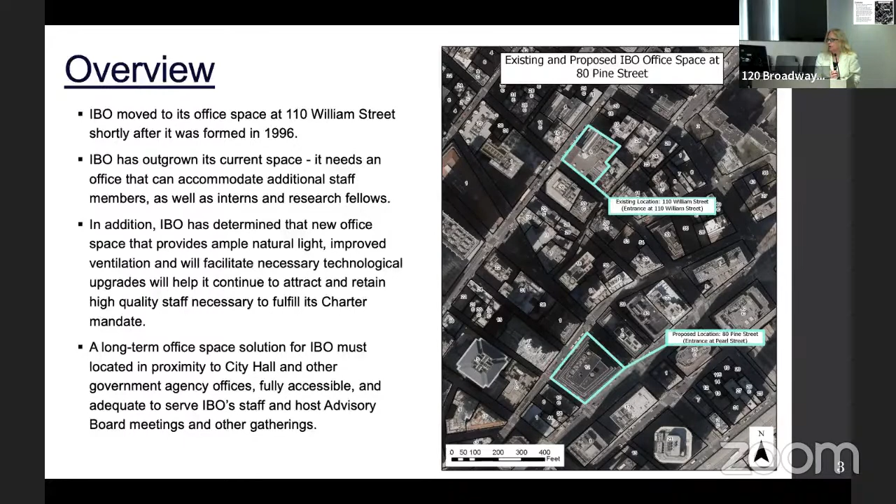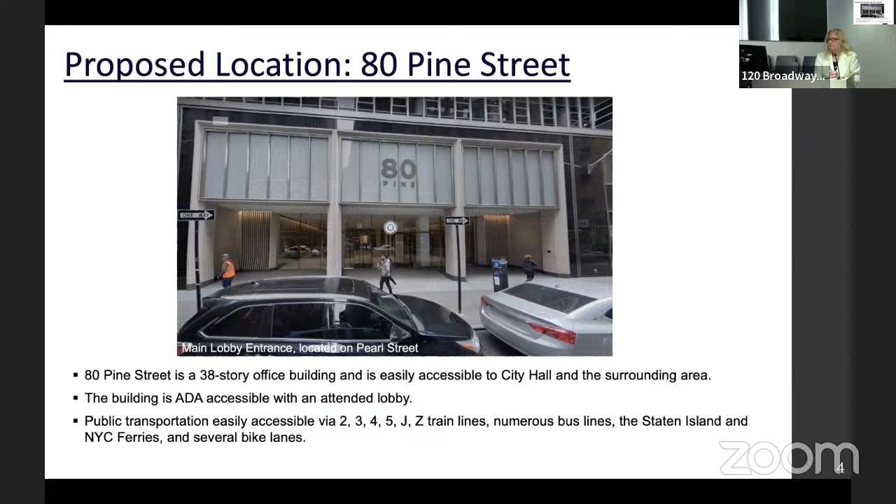Next slide. 80 Pine is, as you can see, well located for what we need for proximity to the key city stakeholders that we deal with, principally the council. And that's it.

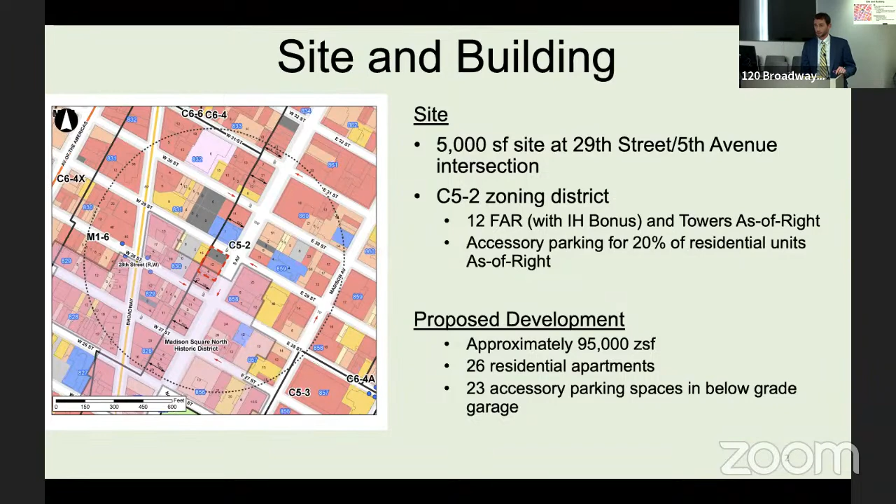Just a little background: 23 spaces, but the driveway, curb cut, and garage itself are all permitted as of right. We're only here seeking an increment of about 18 spaces. It'll be an automated parking system. These are pretty prevalent around the city in these types of buildings for the last decade or so. Completely self-controlled, so really no kind of human error entering and exiting the garage.

Overall, the garage is very small, only 23 spaces, so we really don't anticipate it causing a lot of traffic congestion. But to avoid any sort of conflicts there, and we'll show on the plans momentarily, there are some additional provisions in terms of loading and unloading in the subcellar to prevent conflicts with cars coming in and out that we really don't think will be an issue.

But what we're really proud of is that it's going to be a fully electric parking garage. What that means is that all spaces will be EV ready, so the infrastructure to charge your car will be in the garage. When a driver pulls in and parks their car, the pallet will have a plug you can plug your car into, and then the elevator will take it down to one of the lower levels. Within the lower levels, there'll be 11 spaces equipped with an EV level 2 charger, which can charge a car in up to 8 to 10 hours for a full charge.

And while that's only half of the spaces, the system we programmed will automatically rotate cars in and out if all 23 cars want to be charged. We think there's no other garage in the city that has that capability, so it's a great amenity for residents, and we think it's going to promote the ownership of electric vehicles.

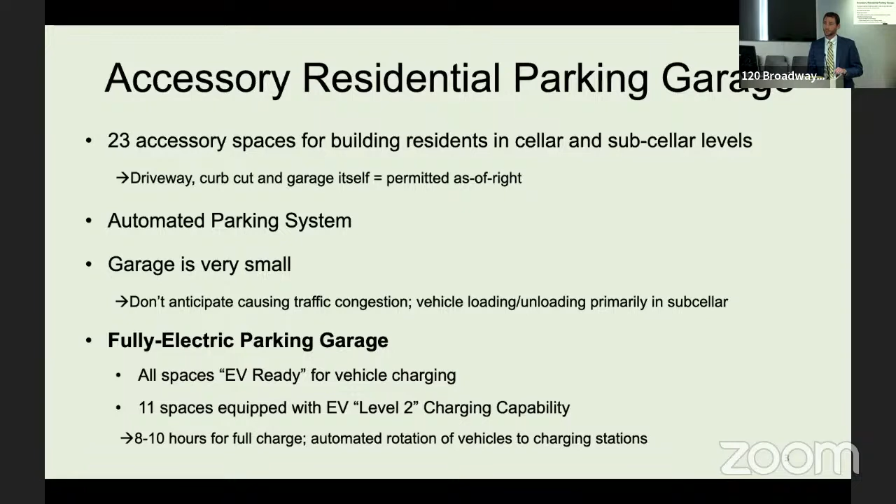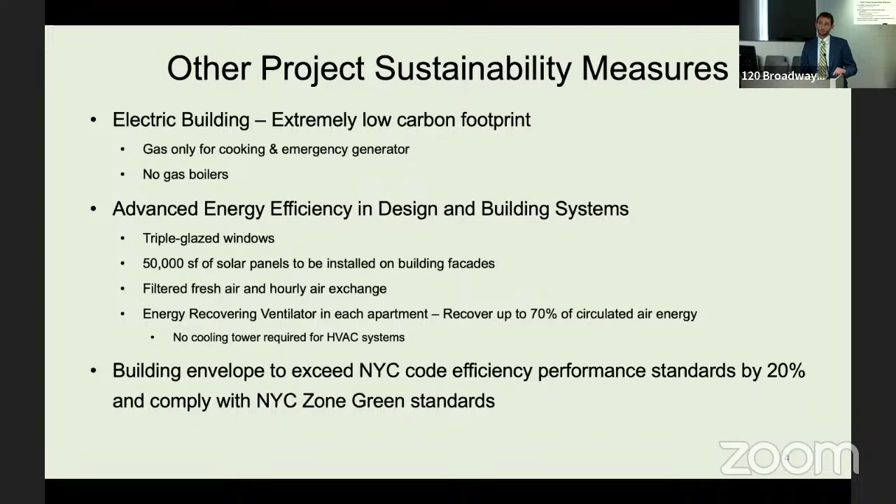Just some other sustainability measures the developer has taken great lengths to pursue for the project overall. It'll be an electric building, except for gas for cooking and the generator. It'll have triple glazed windows, 50,000 square feet of solar panels, filtered fresh air hourly, and energy recovering ventilators in each apartment. Overall, the envelope will exceed code efficiency performance standards by 20% and comply with Zone Green. So along with the garage and EV charging stations, there are a lot of efforts to go above and beyond what's required by code in terms of sustainability and addressing climate change and global warming.

As you can see, here are the 3 subcellar and cellar levels, with the elevator in your upper left. When it gets to the desired level, the robot will pick up the pallet and move it to one of the various available spaces.

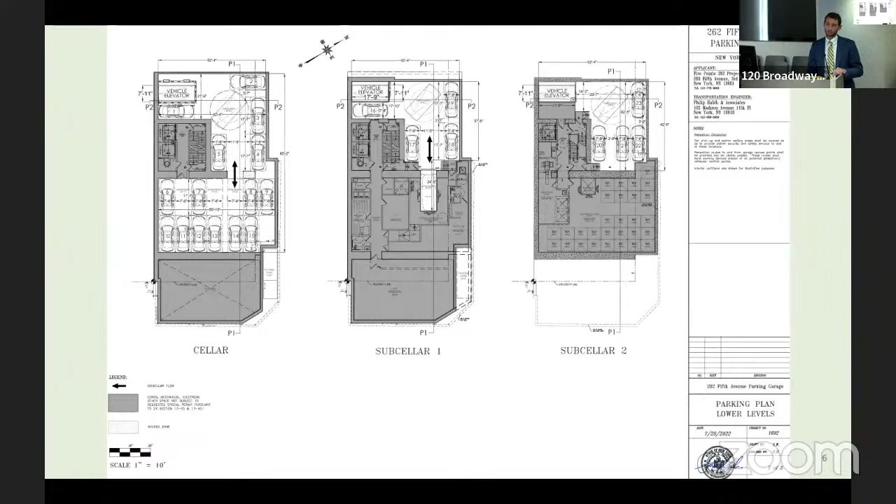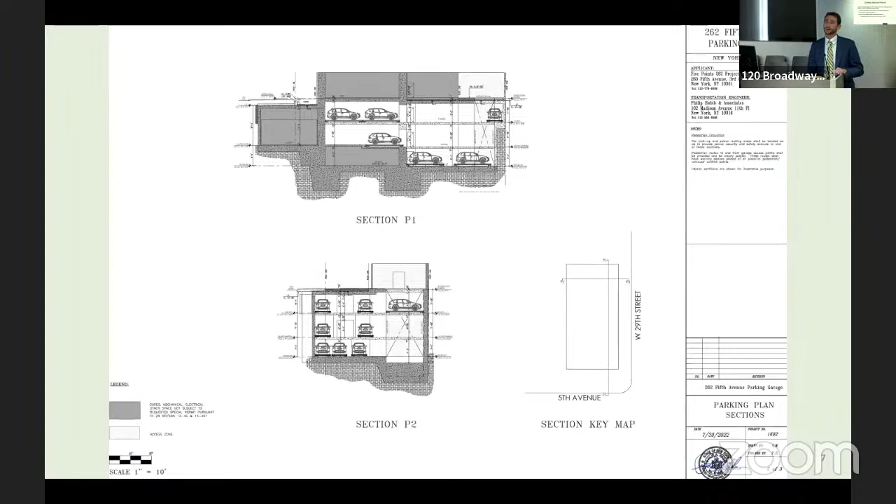And here is a section. Again, all cars will be below grade on the 3 levels. And again, while we're here, the special permit allows 5 spaces as of right based on the 26 units in the apartment. We're seeking an increase of 18, but otherwise the driveway, the garage, and the curb cut will be built because they're permitted as of right.

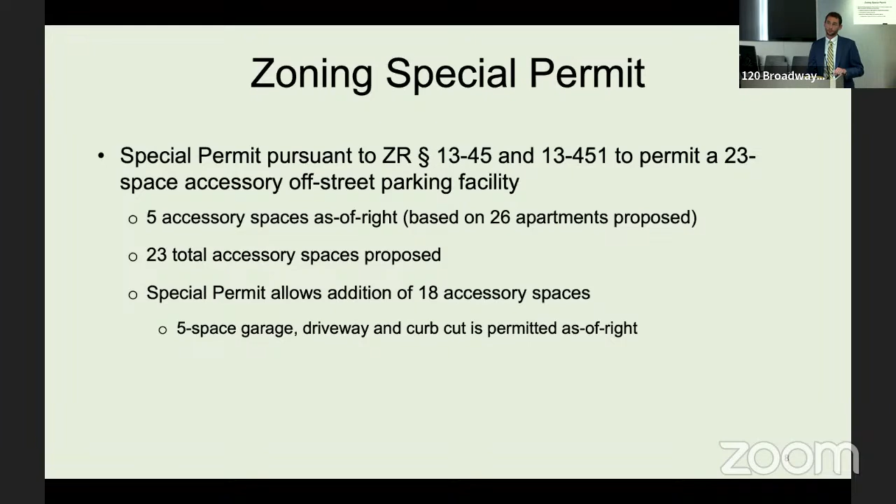And in terms of the findings, I'll turn it over to Jeff. Good morning, Chair Garodnick and Commissioners. My name is Jeff Rubin, I'm a planner with Philip Habib and Associates.

As indicated on this slide, the application easily meets the finding that the number of spaces requested is not excessive in relation to new residential development and changes in parking supply, according to the methodology prescribed by the Department of City Planning.

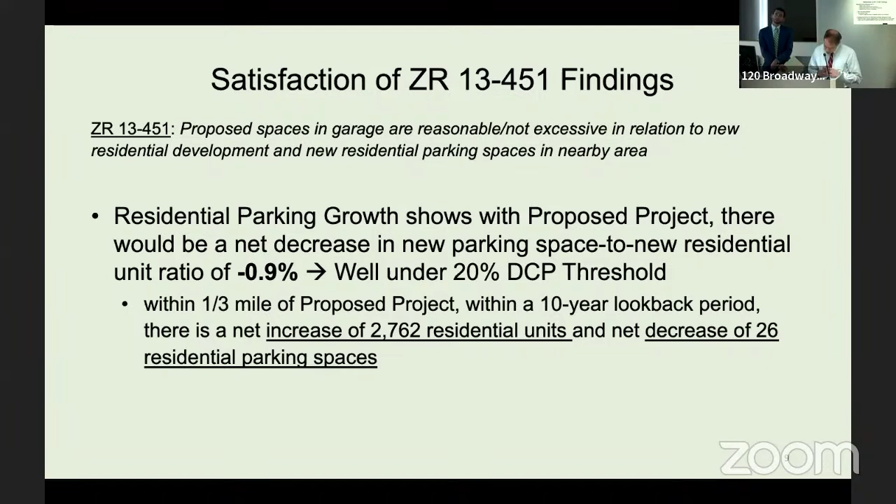Regarding other findings, in terms of traffic, although a project of this small size does not require an EAS, we prepared a travel demand forecast following standard CEQR methodologies. The forecast shows that the proposed 23-space residential accessory parking garage will generate only 8 daily vehicle trips on a weekday and 9 daily vehicle trips on a weekend day, with no more than 1 vehicle trip in any given hour. As such, it would not unduly increase traffic congestion.

As for parking demand, census data suggest that vehicle ownership across Manhattan is positively correlated with high-income households. Given that this will be a building with large family units, each over 3,000 square feet, the data suggests the building will have a much higher vehicle ownership rate than the surrounding area. While the area's census tracts have a 31.5% vehicle ownership rate for owner-occupied units, the building's families will be comparable to those in neighborhoods with a concentration of high-income homeowners. Census data from comparable areas show vehicle ownership rates for owner-occupied households of 75% in West Tribeca, 68% in the area just below Central Park, and 86% in Carnegie Hill on the Upper East Side.

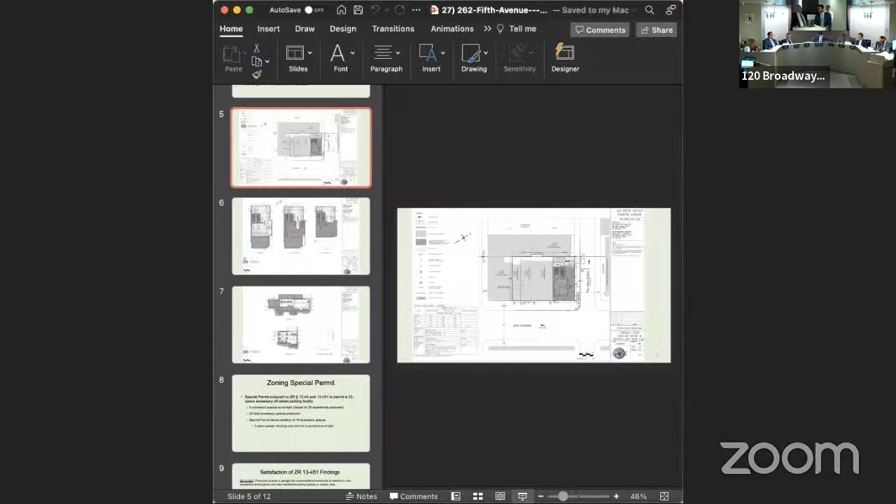The low grade or at grade? At grade. Just walk me through the mechanics. A car comes in and it enters into the elevator, right? Correct. And so the vestibule is just ahead of that space? Yeah, this is looking west, so just below is the vestibule. So it'll pull into the driveway, go through, a gate will come up when they access it through a code or an app. Gate pulls up, they pull into the elevator, they park the car on top of a pallet, which is sitting on the elevator. Everything comes out, and then just to the east, below is where that vestibule is, where the keypad is, they'll put in their code and send it down to the lower levels. If you see the vehicle elevator, there's that white space just below, that's the vestibule.

Here? Further north. Up. Yeah, just the white area. Right there. No, to your left. Yep, right there. Yeah, we need a pointer. The light pointer. Okay. Laser pointers, that's confusing. All right, because it's turned. Thank you, Mr. Vice Chairman.

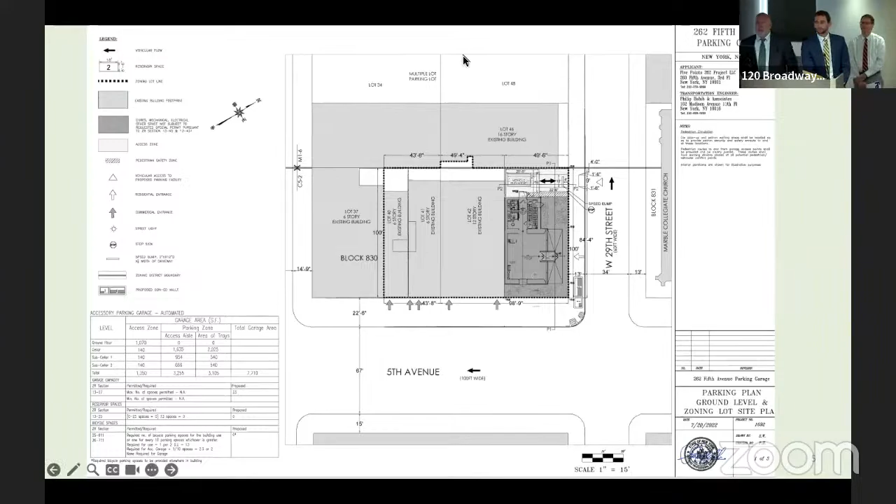No, I'm good. Commissioner Rampersad on Zoom. Yes, thank you, and thank you for the presentation.

A lot of the questions I had were already answered. I just have two quick questions. With regards to each space having an electric vehicle charging station, if the car comes in, does someone plug it in, or how does that work? The owner would be the one plugging it in. It's similar to plugging into a charging station if you were driving around or in a parking lot somewhere. They'll take out their own cord, plug their car into the socket in the pallet, and then the robot and the elevator take it from there to one of the stations below grade. When the robot pulls it into one of the lower levels, it moves it to one of the level 2 charging stations, which has a port in the floor. The pallet is lifted up, the port pops up, connects into the pallet, and it's a pass-through to the car, giving it the electric charge. Thank you for that clarification.

The other question I had was, God forbid there are actually two cars that come in within the hour, what mechanisms are in place so that the car out in the street that wants to turn in knows that maybe there's somebody waiting for a car? Is there some kind of system in place, or proposed to be in place, so people know? Well, again, as you mentioned, it's going to be incredibly low because of the 9 car, at the most, 9 cars in and out of that garage in a day.

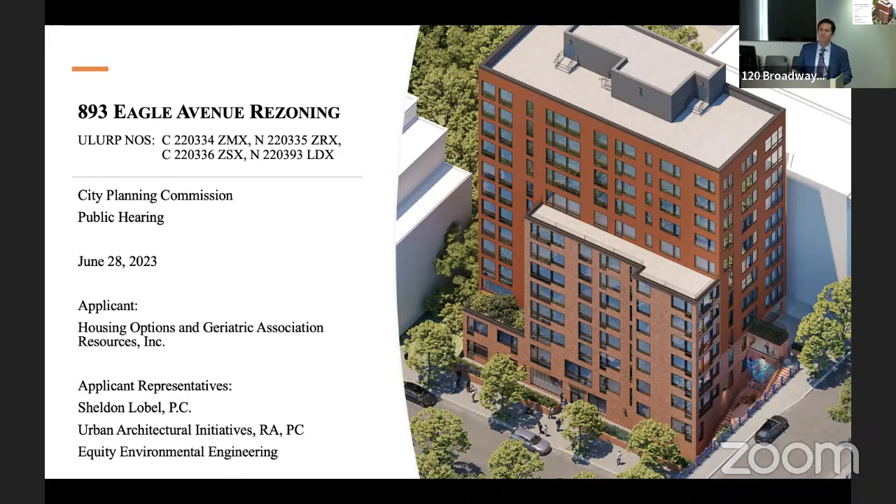Good morning to all of the commission. I'm Ed Papetti, CEO of HOGAR Inc., and thank you for the opportunity to present our project this morning. For the past 27 years, HOGAR has provided housing and supportive services to our community's most vulnerable individuals and families. This proposed project at Eagle Avenue and 161st Street seeks to transform a property that has been vacant in excess of 50 years into one that provides affordable housing for those in need, services for those in need, and employment opportunities to those seeking to join HOGAR in helping those who require our helping hands. As you can see from these slides, the present condition of the lot for 50 years is an eyesore, and we hope to transform that. With that, I'd like to turn the presentation to our development team, and thank you again.

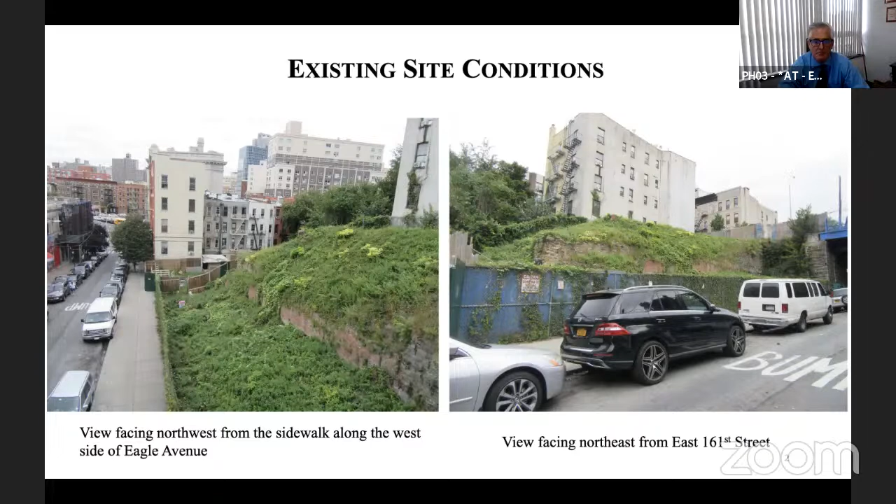Next slide, please. Actually, if you can forward 3 slides to the proposed development. So we're hopeful today that the Commission will join Community Board 3 and the Bronx Borough President in approving this application. Can we go back 2 slides to the project summary? There we go. So, the proposed development.

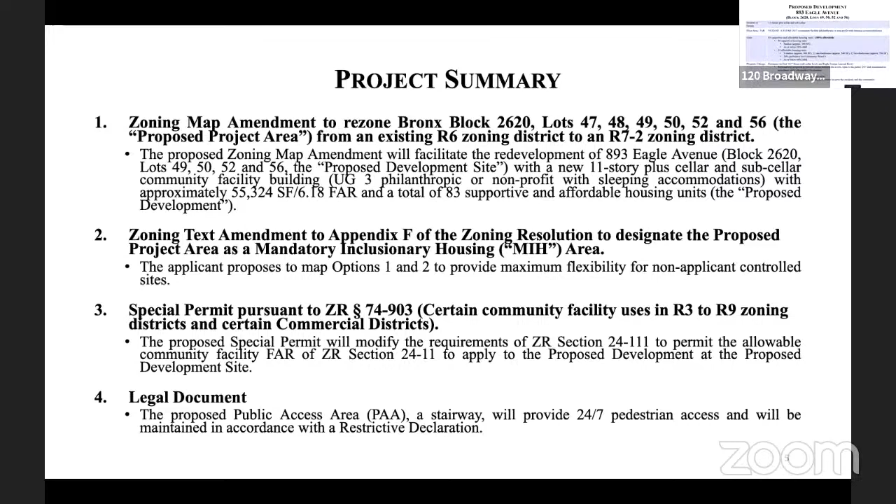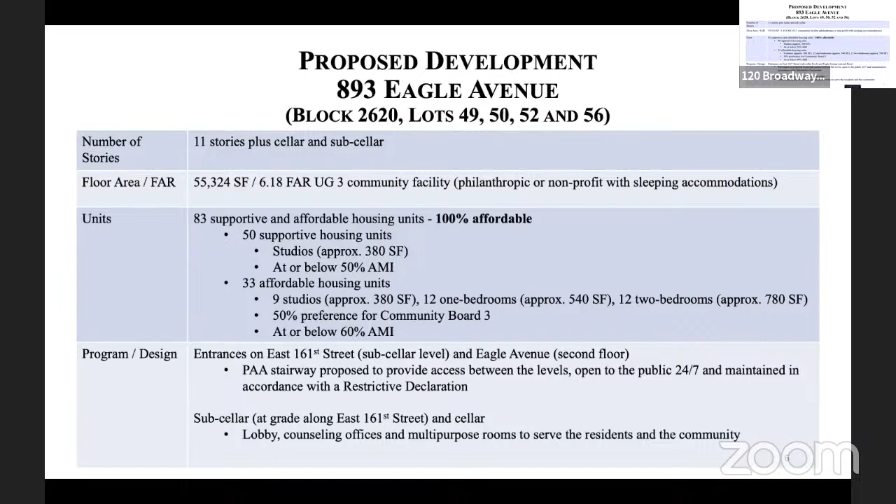So the proposed development contemplates 4 actions. One would be a zoning map amendment from an existing R6 to an R7-2 district, which would rezone 6 lots in order to allow for the development of the 4 lots of the site, roughly 8,900 square feet, with an 11-story building. The second action would be an amendment to mandatory inclusionary housing to allow for options 1 and 2. The third action would be to allow for a special permit pursuant to 74-903 to provide for community facility floor area to apply for the site. And the fourth would be a PAA, a public access area for stairs adjacent to the parcel, which will be included in the plans.

The statistics with regards to the development are before you. This is an 11-story plus cellar and subcellar building. This is a particularly challenging site because given the elevations of East 161st and Eagle Avenue, there's a separation of greater than 30 feet, which Tony will discuss. At the end of the development, we would intend to have a 55,000 square foot, 6.18 FAR, Use Group 3 community facility building. The units would be 83 units: 50 supportive housing units in the form of studios at or below 50% of area median income, and 33 affordable housing units, a mix of 9 studios, 12 one-bedrooms, and 12 two-bedrooms.

Those would be at or below 60% AMI. The program design has entrances on East 161st and Eagle, as well as a subcellar with lobby and associated accessory space.

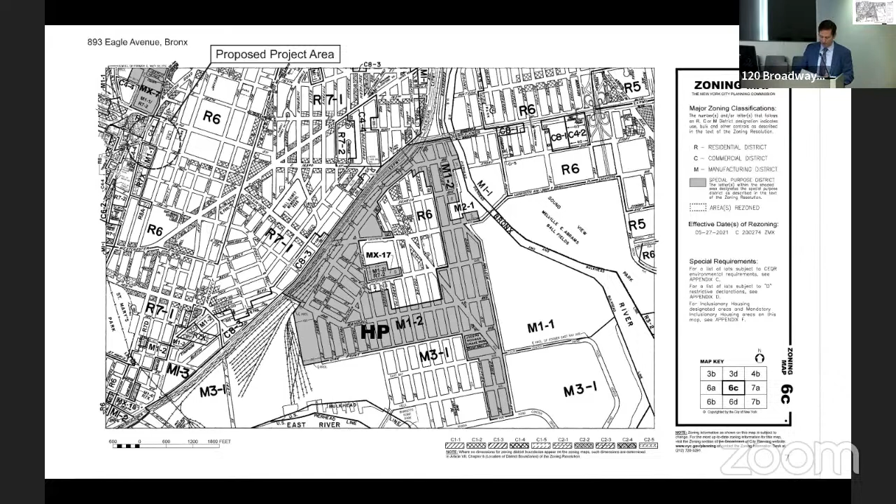The next slide is a tax map which shows the immediate development area. Again, this is a corner with excellent street access to both Eagle Avenue and East 161st Street, and the proposal is for the lots outlined in red to be part of the development site. They are all currently vacant.

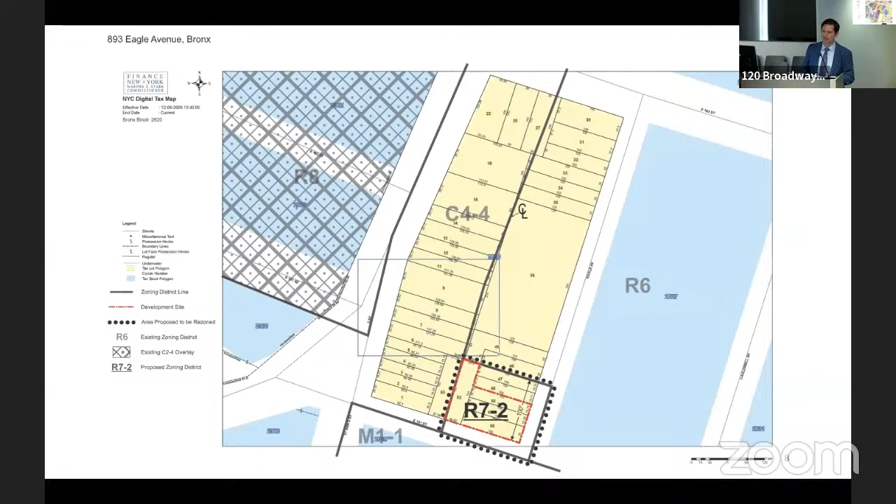The next slide is the land use map, which I think well demonstrates why this site is particularly well suited for an R7-2 rezoning. First, you note that the C4-4 zoning, which is adjacent to the site immediately to the west and on the entirety of the western portion of the block, already permits an R7-2 equivalent at floor area ratios of 3.44 or greater, depending on the nature of the development. In addition, you can see the R7X and R8 to the west of the site. As previously noted, this is an area where medium and medium-high density zoning districts abound.

The street system in the area is also well suited, with excellent street access for both the site as well as the entirety of the block. 3rd Avenue, adjacent to the block, is a wide street which allows for several bus lanes as well as benefiting from nearby subway systems. I believe the 2 and 5 lines lie within 6 blocks of the site. So it's really a site that is well suited for this type of development.

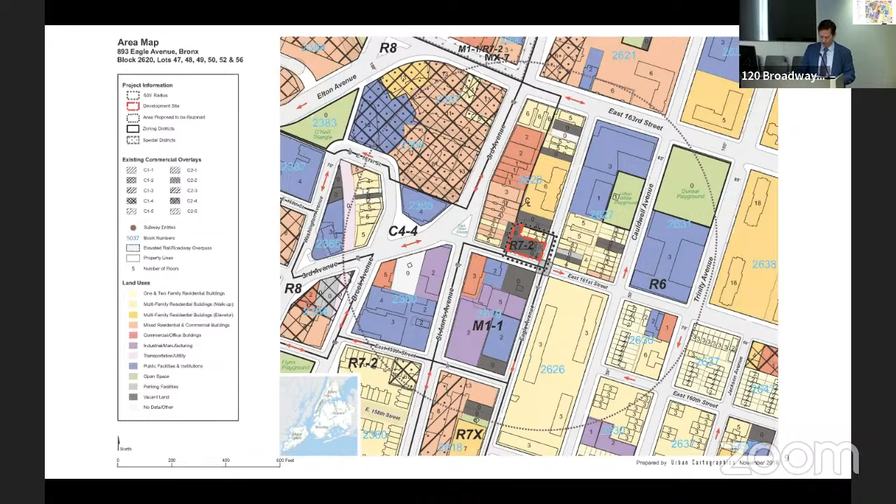With that, the next several slides are photographs, and I would introduce Tony Shitemi of UAI to discuss the project architecture.

Is Mr. Shitemi on Zoom? He is on Zoom. There we go, okay. Tony, we don't hear your audio. He's off mute, but the mic. While Tony fixes his audio, I'm just going to run through the contextual and architectural aspects of the presentation. Fortunately, I have a junior architecture degree from spending so much time with those guys. If we can go past the photographs to this first - is this any better? There we go, thank you, Tony. Okay, although Rich, I was sitting back to listen to you. Sorry about that technical glitch.

Good morning, members of the commission. I'm Tony, architect for Hogar, here to present the design description. Sorry about the snafu. I'll give you a few overall highlights and the essentials of the project.

As you can see, and as Richard demonstrated, the project is located at the intersection of 161st and Eagle Avenue, which rises 33 feet above 161st, presenting a very interesting site in terms of the slopes. With respect to building heights, the design aims to respect the existing heights of surrounding buildings. Although the new building will be 11 stories tall, it will be set back from the street. Along East 161st Street, the building will drop to 2 stories.

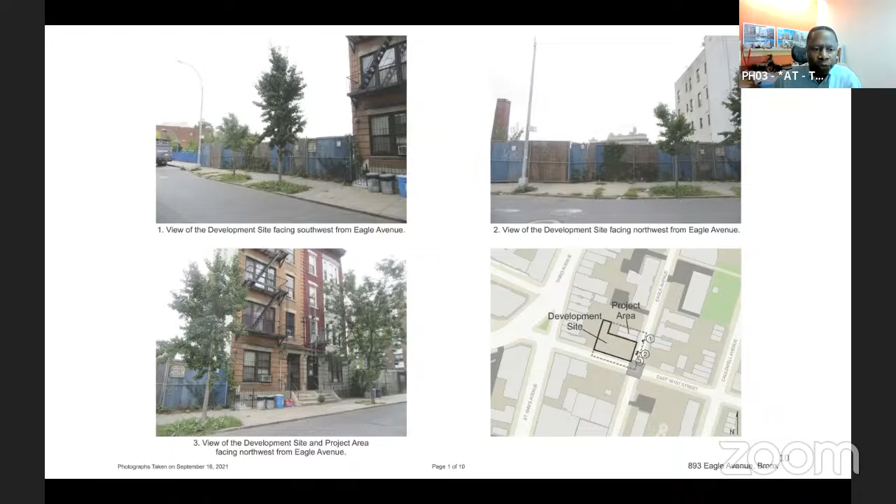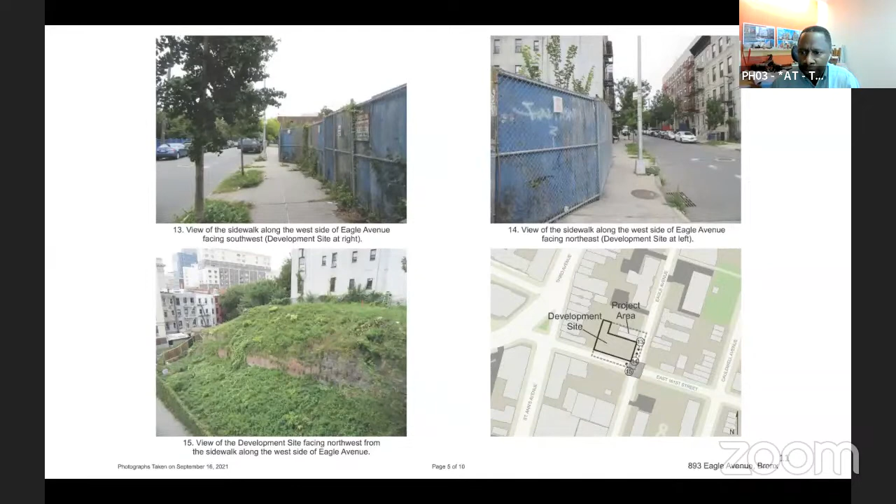Can we go to the next slide? The large perspective, if it's available. And that'll relate to the quick narrative. We have that overall perspective, Amanda? It's one more, or two more, one more from me. There you go, okay, the one of the building. I'm sorry, one more. Yeah, sorry folks. Okay, so here we go.

So the east is at the bottom right, and the west is to the left. North is facing up the page and south down. Again, the building aims to respect the heights of the surrounding buildings. There'll be 11 stories, set back from the street, as you can see. Along 161st Street, the building will drop 2 stories and then step up to 8 stories, acknowledging the existing 5- and 6-story residences.

And then we can go to the one before. The aerial maps indicate the presence of 200-foot tall residences just 2 blocks away, and others of similar height in the vicinity. Are we able to go to that diagram?

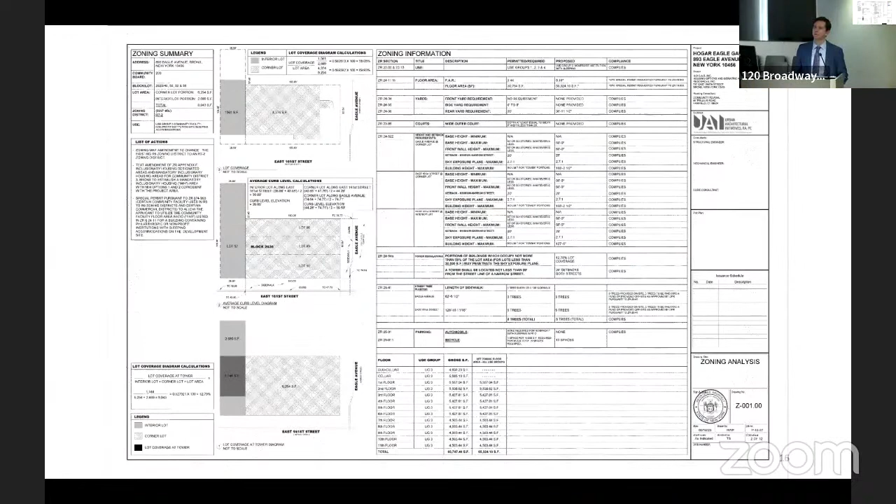I think it was before. I think it's back to. Yeah, sorry about the shuffling.

I'm going to go back two slides. Okay, I think it was right before this.

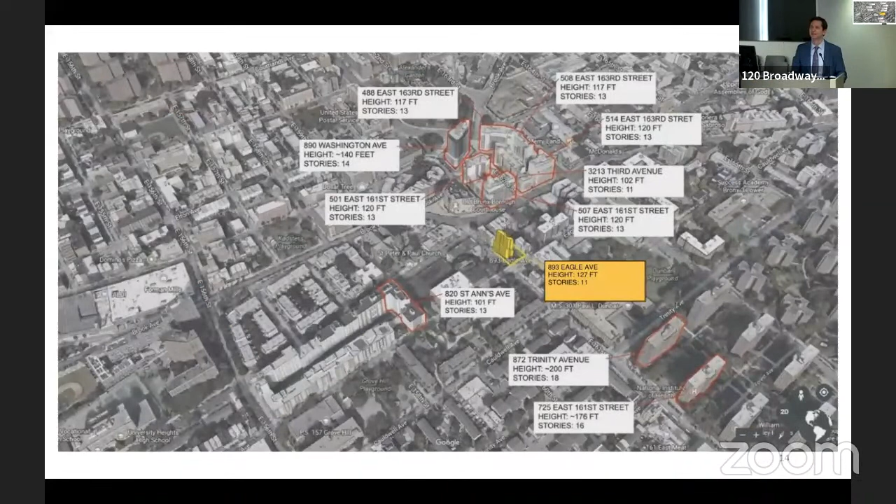Yeah, there we go. So again, you can see some 200-foot buildings around the vicinity. Our building's 127 feet, so within the vicinity we're complying with, or keeping respectful to, what's surrounding.

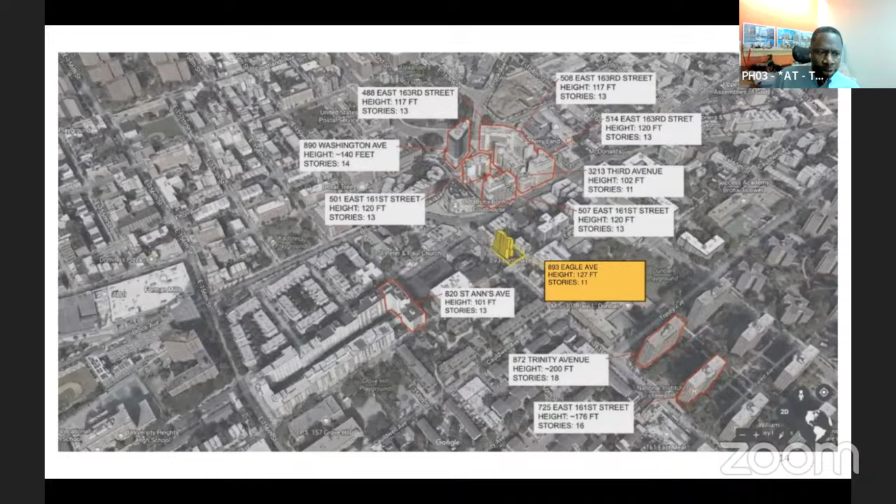The structure will be concrete block and plank, as the engineers proceed, that's our anticipation. So we're improving the accessibility in the area.

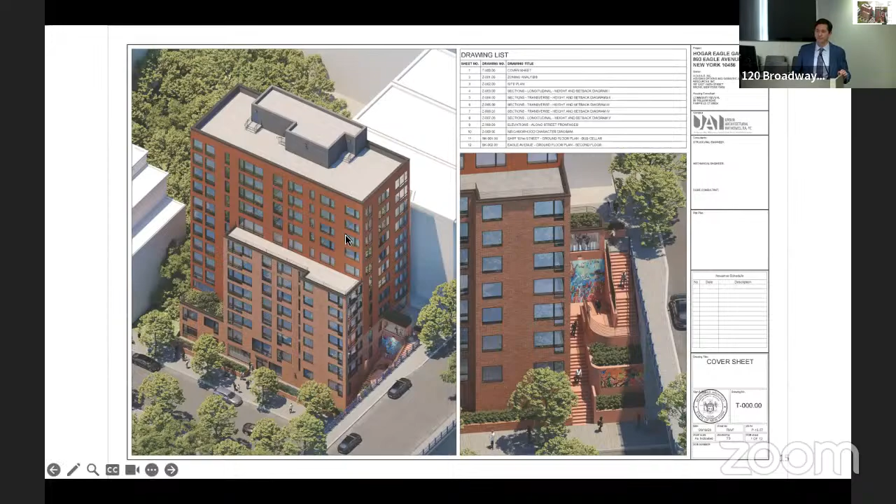Okay, yeah, sorry, thank you Mr. Shatemi. Okay, Richard, you. Right. Are there questions for the team? Okay. Commissioner Dweck, Commissioner Benjamin, Commissioner Osorio, in that order.

Thank you, Richard. Can you explain to me the staircase on the side, what that serves exactly? Sure, so it's going to be maintained.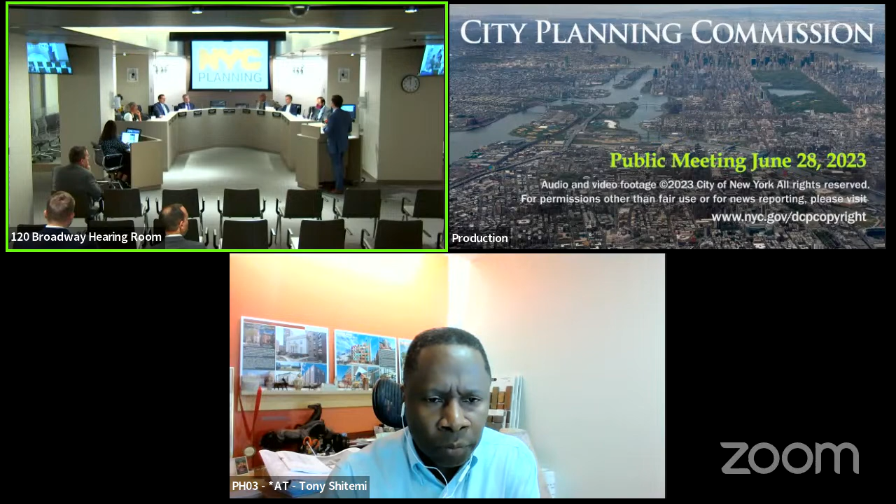Given the separation in grade of 34 feet, and the fact that this development is also subject to the special permit, upon discussion with the department it was determined that it would be beneficial to allow for this stairway to be permanently operated and maintained by Hogar. There will be a restrictive declaration as part of the approval recorded against the property.

Hogar would provide for maintenance of the staircase, would provide for security, 24/7 access, as well as some other benefits to the area in terms of public art, which would appear within the stairway itself.

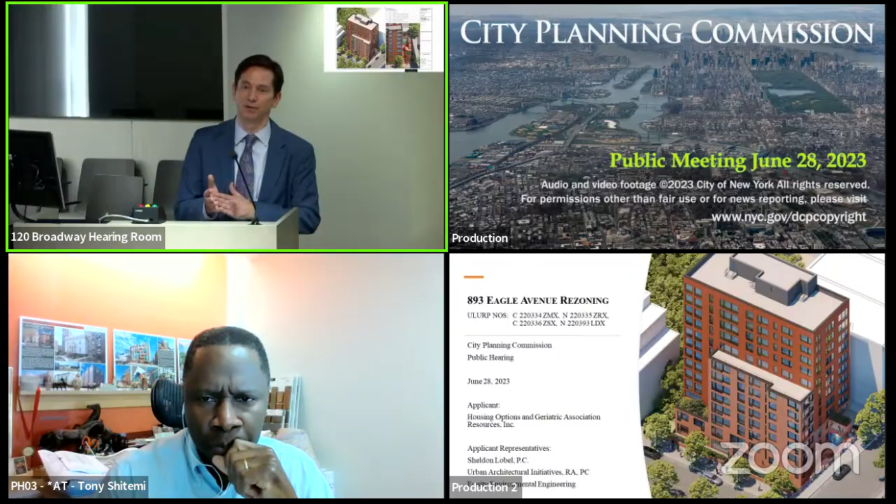We would note that given the separation in grade, this is actually a tremendous benefit to residents on East 161st Street, who will now be able to utilize that and save themselves what we determined to be a relatively long walking distance in order to access Eagle Avenue and some parks and public gardens below. So it's really one of the benefits we discussed with the community board as well as with the Bronx Borough President, and the applicant is happy to provide that as well.

I realize that it might be very cost prohibitive, but any accommodations for handicap accessible? I'm going to defer to Tony with regards to handicap accessibility.

So within the building will be entirely handicap accessible. With respect to the access stair, no, there's no elevator or anything like that at this stage.

Would it be, maybe I would recommend you pursue, perhaps in conjunction with the borough president's office or with the council member's office or with the city, some ability to provide handicap access before you construct it. It'd be a great public benefit to people. I think it's something that the applicant would be happy to explore.

And the project is receiving public funding, as Hogar's a nonprofit and has been working on this coalition for years. So that's something we would look at, obviously there's some tremendous challenges. I'd also take the opportunity to add that the site itself, given the rock outcroppings, cost literally tens of millions of dollars merely to allow for this development. But again, we understand the worthwhile nature of the request, and it's something I think we would love to provide. I'd love to see more public funding for it to get it done.

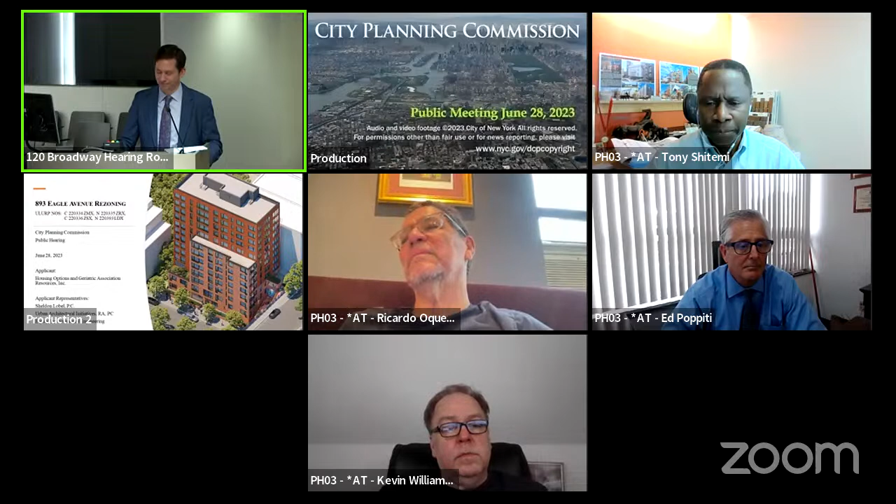Thank you, Vice Chair, thank you for the presentation. I have a couple questions. First, to follow up on Commissioner Dweck's question—it's exciting to see a passive house, fully electrified proposal. Congratulations, that's exciting, but I want to hear a little more about that. I'm wondering if you can share how that's going to work.

What are the components of that system? And what is the connection between your plan to comply with Local Law 97 and your plan to comply with Local Laws 94 and 92? I want to understand what's going to happen on the roofs—your renderings show a very flat, concrete-looking surface. Also, will the passive house approach include provisions to power the lighting on the staircase, given the 24-hour requirement?

Thank you, it's a pleasure to answer that. The elements of the passive house will definitely include a well-insulated roof. There's a possibility to install a green roof at the top, which reduces the heat island effect and helps control stormwater. We're still analyzing whether photovoltaic cells may be possible, and that would affect whether we have the green roof below or not. In either case, the roof will be well insulated.

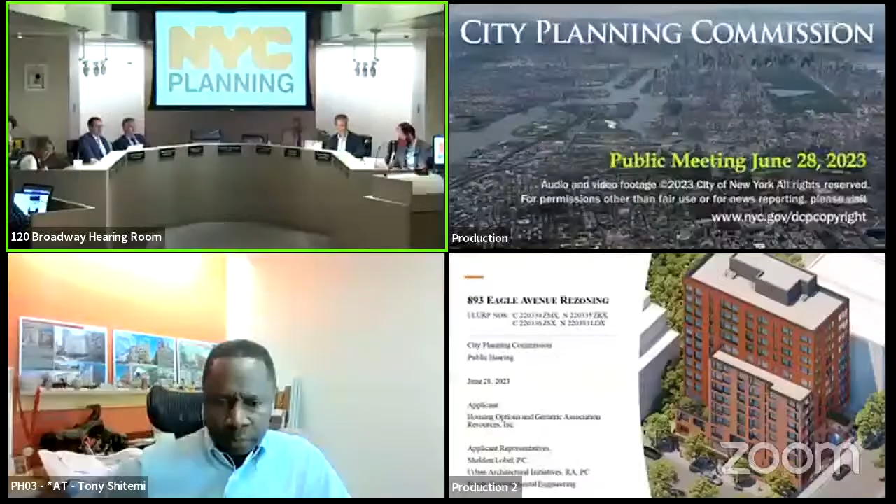Borough of Staten Island, calendar number 31, CD3, N230112ZRR. Public hearing in the matter of an application for a zoning text amendment concerning South Richmond zoning relief. Notice, a public hearing is being held by the City Planning Commission in conjunction with the above ULURP action to receive comments related to a draft environmental impact statement. This hearing is being held pursuant to the State Environmental Quality Review Act and the City Environmental Quality Review.

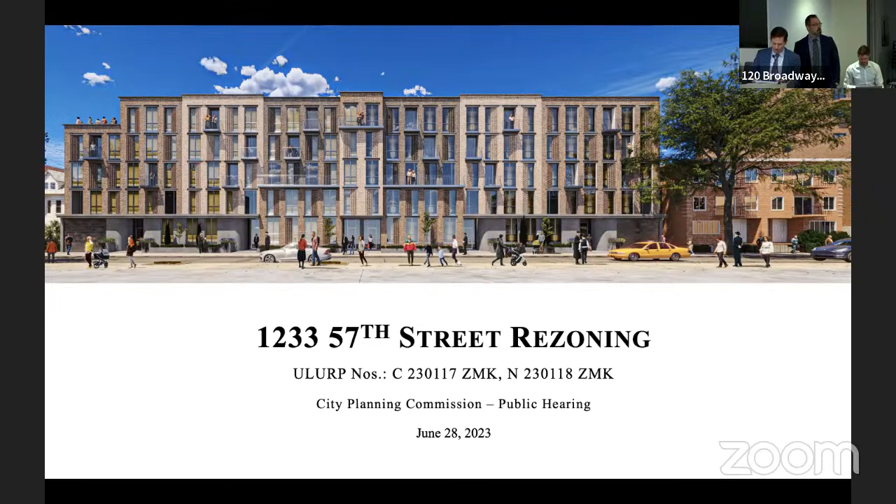This is a rezoning for lots along 57th Street between 12th and 13th Avenues in Brooklyn, from an existing R5 zoning district to an R6A zoning district. This would facilitate at this site a 5-story plus cellar and subcellar residential building with roughly 79,000 square feet of floor area, allowing for 46 dwelling units at 1233 57th Street.

This would also allow for, per item 2, a zoning text amendment to MIH, which would create 12 affordable units at this site in conjunction with the 46 total units. This is particularly meaningful in this area, as MIH has not really produced much affordable housing within the local community board, which I believe is one of the benefits of the proposal.

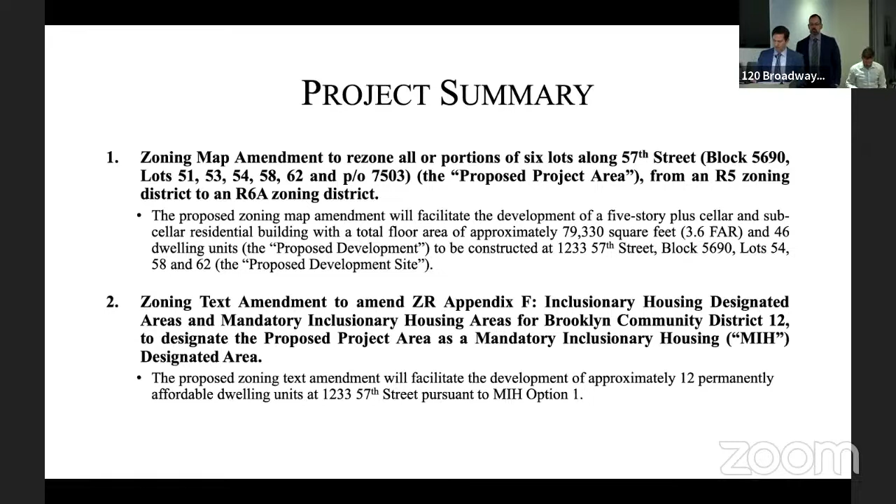The numbers regarding the development are as follows. We include both the certified numbers on the left and what's been proposed pursuant to a reduction in height. I'll leave you with the proposed development: a 5-story building with the same FAR and a lesser number of units. In accordance with community discussion with stakeholders, we reduced the height by 3 stories to provide the same square footage but larger units.

A better ratio, or at least a robust ratio, with regards to parking, and importantly, a building which ranges from 4 stories to the west along the lower residential buildings to 5 stories. This is well within the context of the area and this block, which includes 8-story buildings pursuant to the adjacent R6 district.

You'll also note that the bedroom unit breakdown includes 38 3-bedrooms, 4 4-bedrooms, and 2 5-bedroom units. This results in roughly 44 of the 46 units being 3 bedrooms or greater, which is sensitive to the needs of the local area.

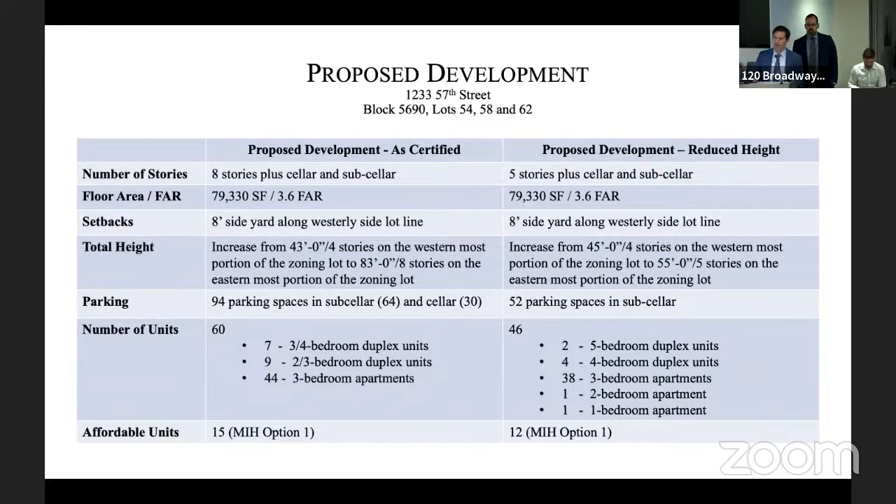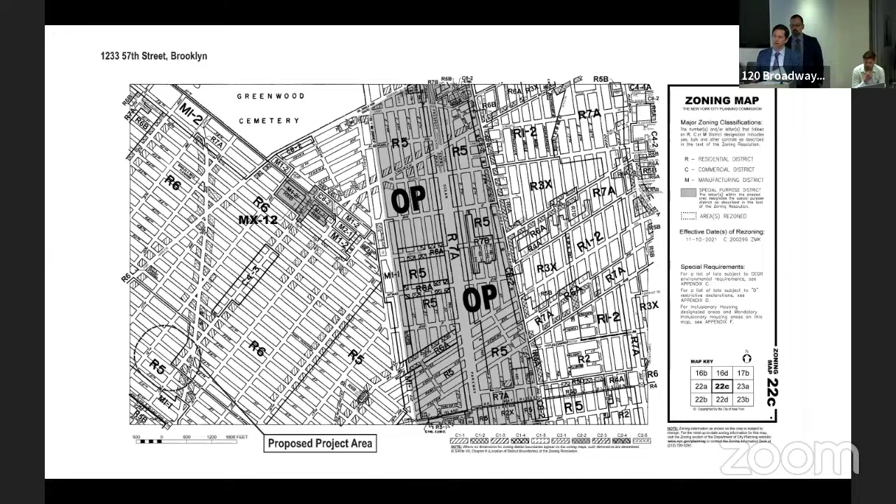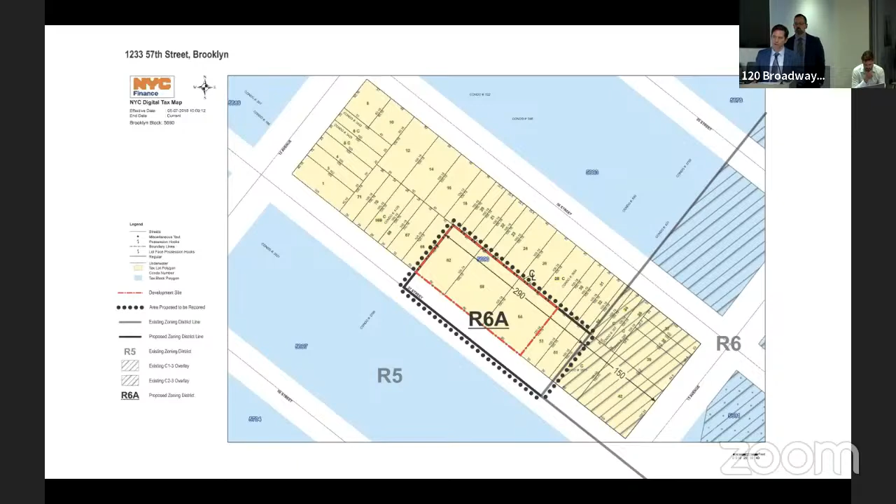As the Commission is also aware, importantly, the ratio of affordable units in the building will mirror the ratio of units generally in the building. So this would allow larger 3, 4, and 5 bedroom units to be devoted to mandatory inclusionary housing. We feel this is a great benefit of the project.

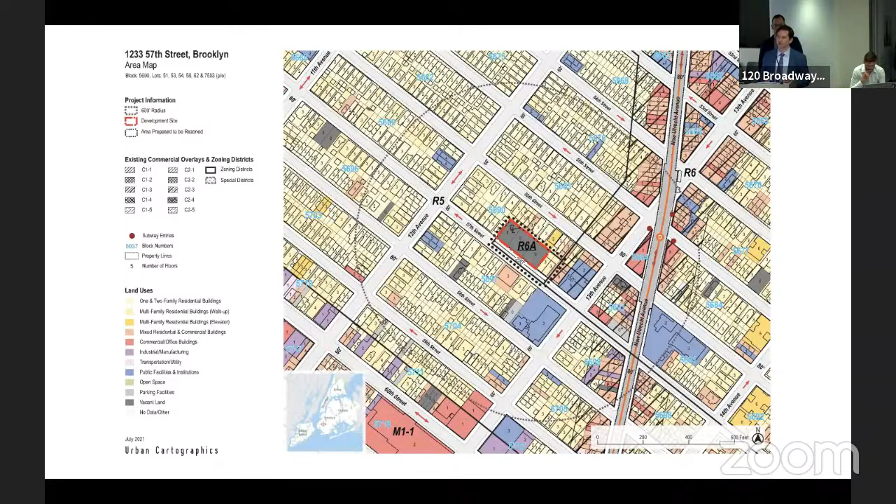I would now introduce Nick Liberis, who will talk briefly about the surrounding area and the project architecture. Nick? All right, thank you Rich. Thank you all for your time.

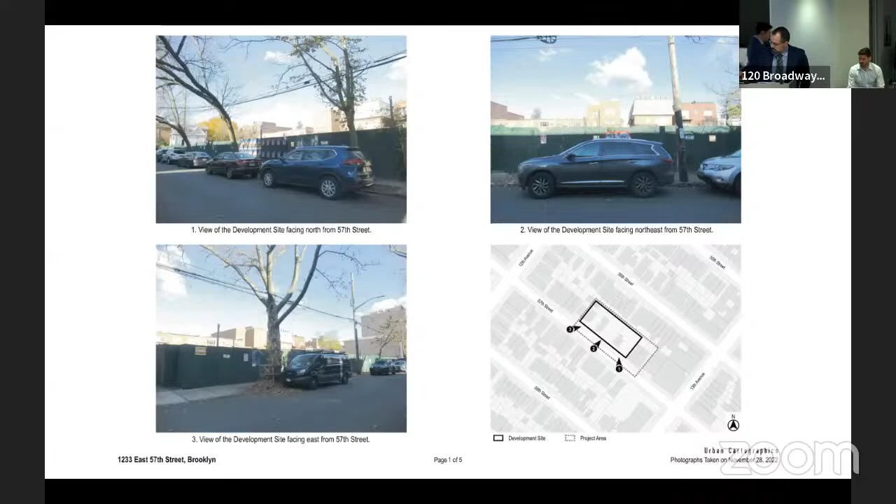This is on 57th Street, looking south and also to the west, and you can see there's a lot of these single-family homes, some of them detached, and these are very large homes. The street wall is about 35 feet, pretty consistently. And if you were to go to Google Earth, you could see that the bulkheads often peak at about 52 feet.

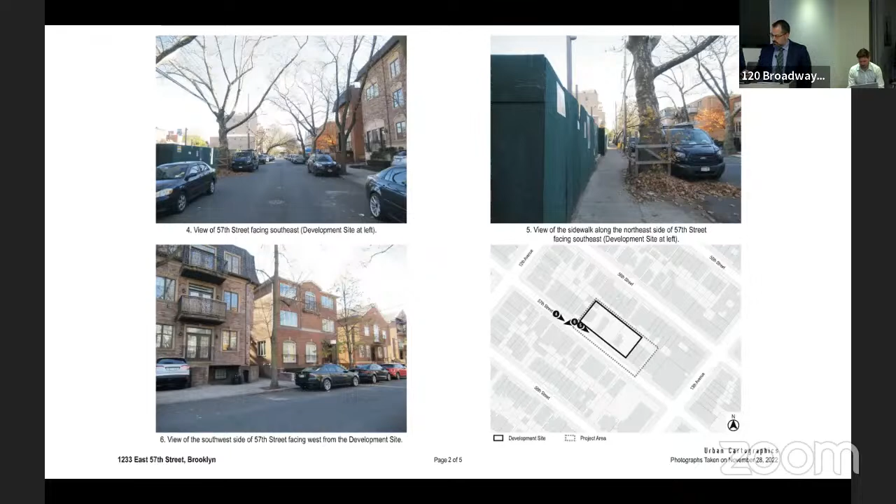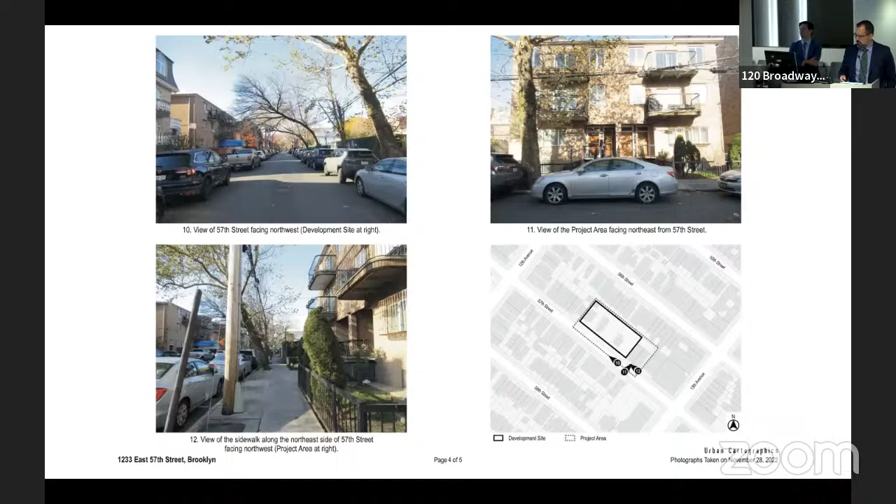This is also something that's on the street. This is what's right next door to the site, this one at the bottom left, and this is about 35 feet to that eave. This is actually a peaked roof, so the top of the peaked roof is about 40 odd feet, let's say 40, 41 feet.

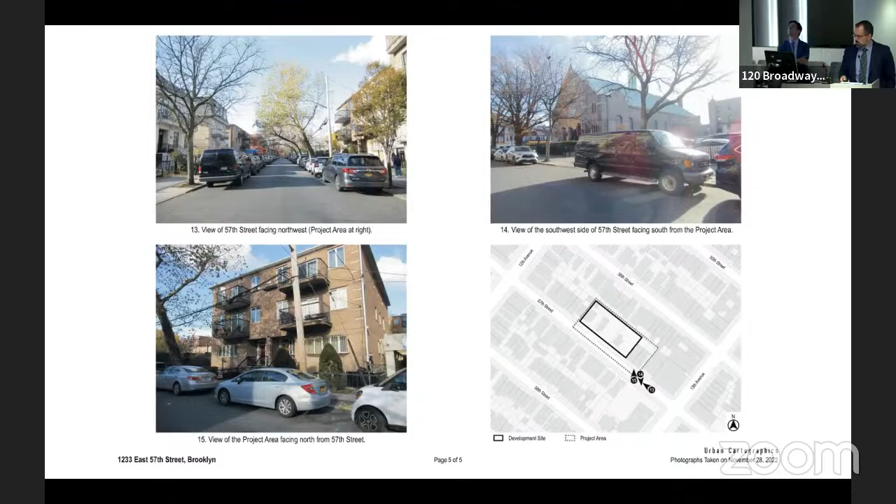And there was a lot of outdoor space. This is something that we're always trying to do for these communities. We've done very many units at this point, so for this community what we're always trying to do is give them outdoor space that has room for the sukkahs. And this was something which was roundly rejected.

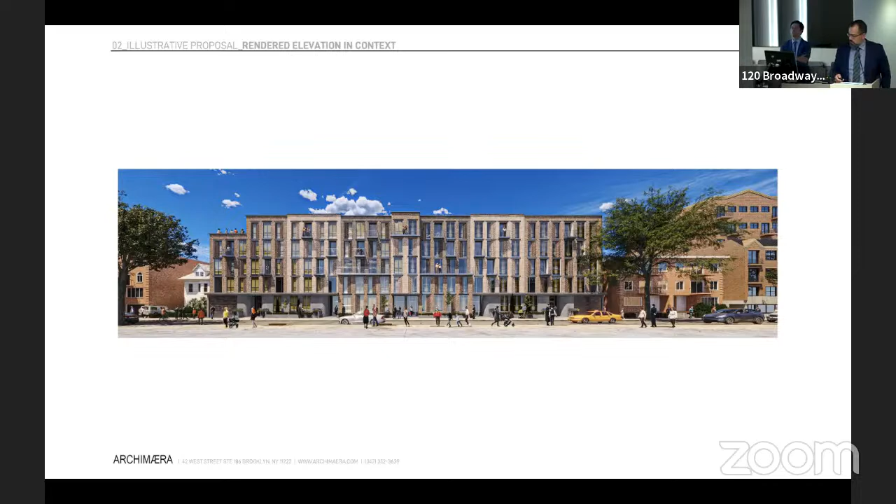We've come back with this, which is much more humble. In the subcellar, we have 52 parking spaces. What this forced us to do when we went down to the 5 floors was put stuff into the cellar, so we have adequate adjacent space to get light and air.

This is where the largest units are featured. You have the 5 beds at the 2 ends, and then the 4 beds in the center. So on the ground floor, you can see these massive units extend front and back. And you have an entry for the car, all the way to the east side of the site.

So you have the cars coming in from the east side, and then they come down all the way to the subcellar, and when they exit, they go back up. We think this is a crafty way to deal with any traffic and how it might impact the site.

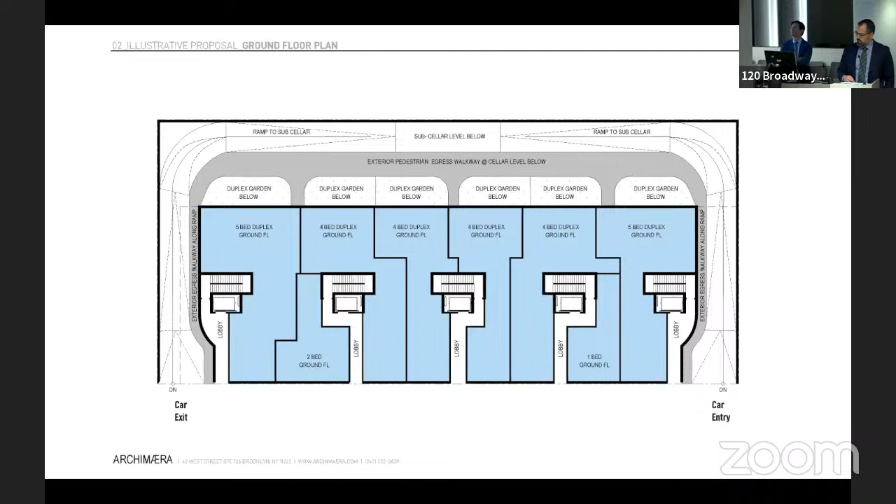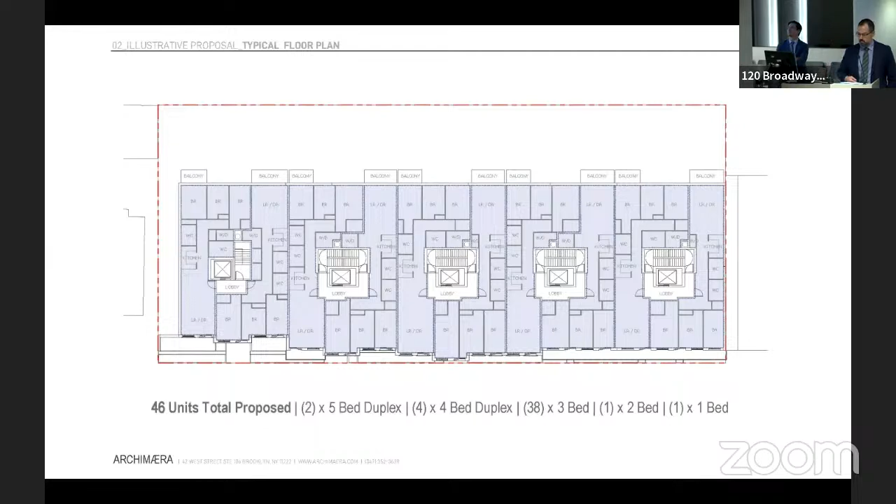The typical floors up above have these back-and-forth three beds. This is a very desirable unit type. People always want to see their kids when they're coming back from school, so they'll be at the front, and also they want to watch the kids in the back. So this is something we can do with these types of layouts.

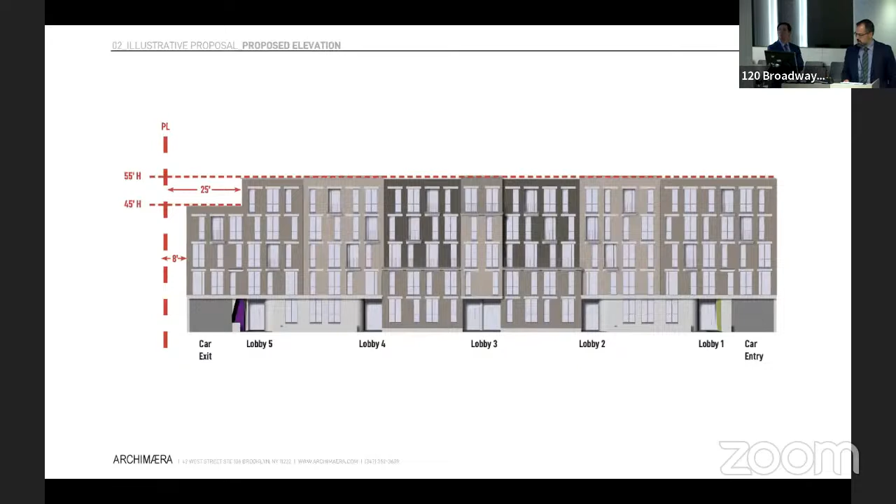This is the reduced height over here. We have to remain 25 feet distant from the R5 side at the west, and we also have to set back 8 feet for that side yard. You can see here we have something very humble. It's quite low. And with that, I'll pass it off to Max.

Hi there, Max Stember-Young with Langan Engineering. We prepared the environmental assessment statement on behalf of the applicant for this project. I want to note that we took a conservative approach to the environmental assessment statement. We note that the applicant is proposing large unit sizes to accommodate and analyze the worst case condition.

In closing, we'd note that this R5 district would permit a 2 FAR floor area ratio for community facility development. On a 22,000 square foot site, that would allow for a 44,000 square foot medical office building at 5 stories, which is actually what's proposed for the proposed R6A residential development. It would also allow for what would amount to thousands of vehicular trips on a weekly basis, which would add traffic to the area as well.

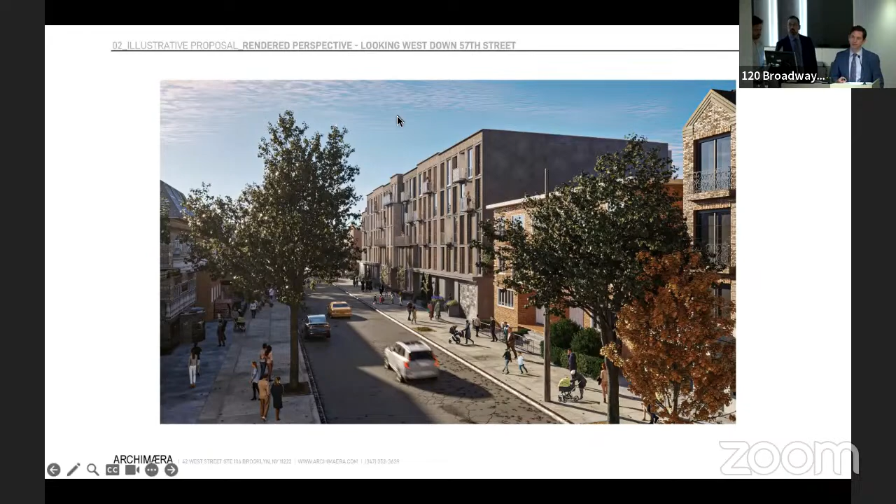Okay, thank you, Mr. Lobel. There are questions, but let me just start: what has been the reaction of the community to your second modified proposal?

So it's been negative. Brooklyn Community Board 12 is a community board—I've presented dozens of applications before this community board over the last 20 years, so this was a particularly challenging discussion. And so much of the discussion at the community board was around height and density.

While we do a lot of work in Brooklyn and with rezonings, the local area felt particularly here that this would be disruptive to the local context. So when we came with the proposal, particularly the revised proposal, there was an attempt to discuss sensitivity to allowing for density which would respect local households, to demonstrate that what we wanted to do here was something which wasn't operating outside of the community, but within the community.

Our developer, our applicant, was purposefully proposing larger units of reduced height. But regardless of that, the community board did not approve the application, and we continued discussions with them, but were unable to come to an agreement. We do note that the Brooklyn Borough President did approve the application at R6A.